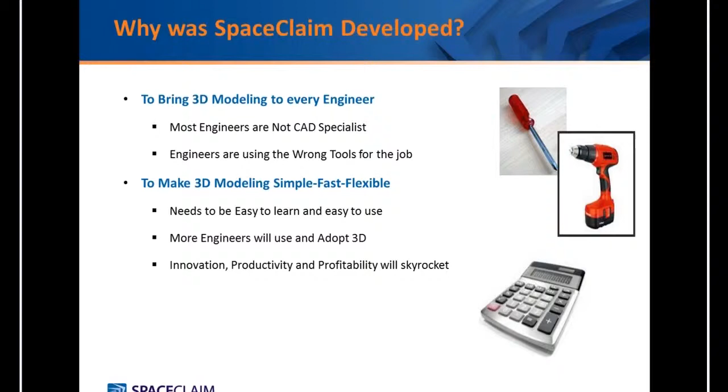So why was SpaceClaim developed? We're founded by the same guys who pioneered feature-based modeling, Mike Payne and Denny Dean among them. They recognized that there's the CAD specialists, and then there's everyone else around them - the engineers, the analysts, the engineering manager. CAD isn't exactly their core competency, and they certainly have plenty of things to do. The traditional CAD systems are just too hard to use, too hard to learn, so SpaceClaim was developed to address that problem.

Well, how do we do it? To get right down to it, it's the user interface interactions. It's simple and streamlined, it's intuitive to use. You want to change something, simply select it, pull it, and move it. You don't have to struggle with feature history or a feature tree, so it's inherently more flexible when it comes down to modeling and making changes to your model.

So how are customers using SpaceClaim? Our customers are using SpaceClaim anywhere from manufacturing, creating fixtures and tooling, to prepping models for FEA. For today's session, we're going to focus primarily on using SpaceClaim in prepping a model for additive manufacturing - it could be the traditional SLA, SLS prototyping process or the newer 3D printing process. Whatever the case may be, there are a number of problems that SpaceClaim can help you solve.

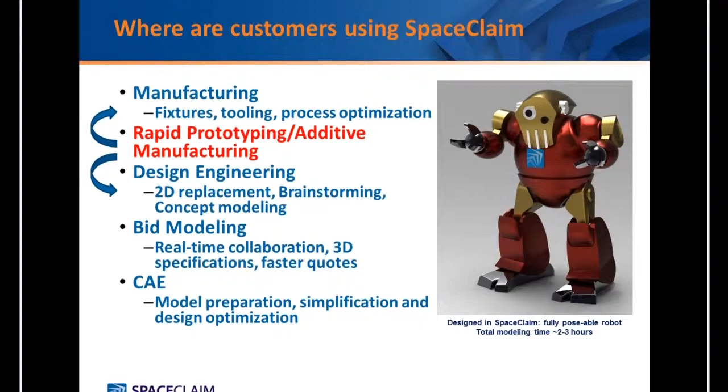On the right-hand side here, we have a little plastic toy model concept that I modeled in SpaceClaim. It's a fully posable robot with a lot of joints in it that took about 2 to 3 hours total modeling time. Since it's an assembly, I had to do a lot of pre-processing before I could send it out for printing. Our friends at Solid Technologies were kind enough to print this model out for us on their Z-Corp printers. They printed this 6-inch model on their Z-Corp Z450 printer, one of the larger models. It took about 5 hours to print, and the actual material cost itself is about $30.

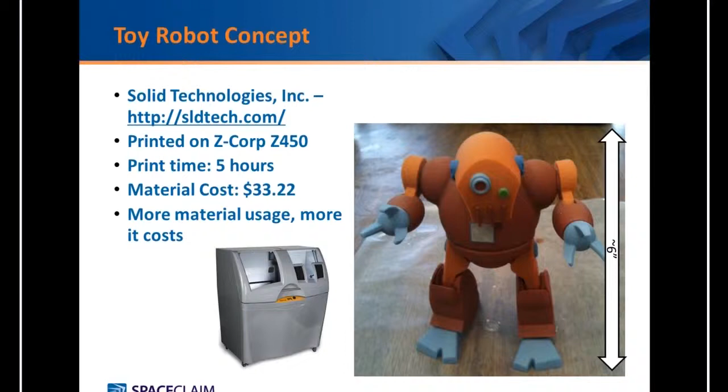Obviously, if you use more material, it's going to cost you more. If you want them to print it for you, it's going to actually cost you about $250 because there's some manual labor involved in the printing process.

There's a couple of illustrations here to show you what they do. What's unique about these Z-Corp printers is that, well, they're like any other additive process - they build the model layer by layer, but they build it on this powder matrix that's really like plaster. The print head actually prints in color, so you can see that the final product actually comes out in multiple colors versus other processes.

Once the model is done, they have to take it out of the powder and then do some fine depowdering, which they can then recycle and reuse. Once the model is done, they'll also have to coat it and essentially seal it with some type of resin so that it's more durable. It's a really neat process. So this is one example of additive manufacturing.

So let's jump into SpaceClaim for a second and see how we can use SpaceClaim to pre-process our model for this kind of 3D printing.

So I have an empty design here, and the first thing I'm going to do is import a couple of files. You can see from our file type list that we're able to import a number of different file types, including major players like CATIA, ProE, SolidWorks, as well as some generic files like STEP, ACIS, and Parasolid.

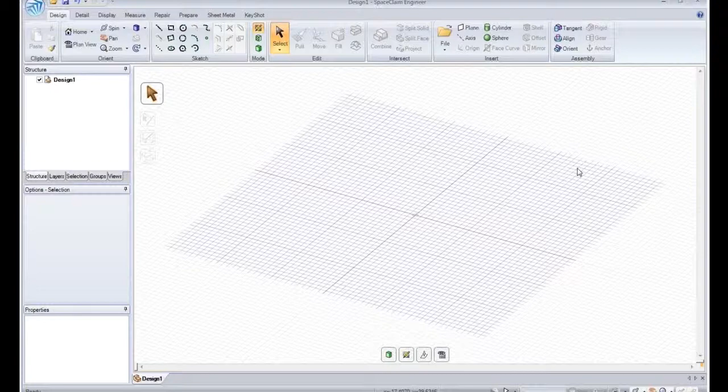So if you're working in a multi-CAD environment, SpaceClaim is a great tool to use. I'm going to set it to all files here, and I'm going to grab the STEP file as well as this ACIS file, and import them both at the same time.

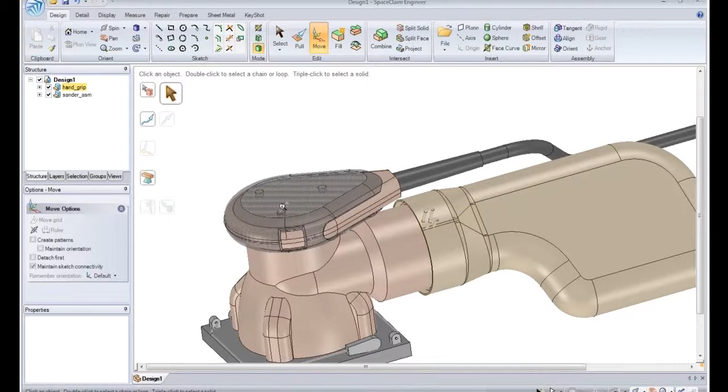Now that I have my sander model in here, I want to first make sure that everything is a solid, because in order to send your model to the 3D printer, the geometry has to be completely watertight solids. From first glance here, I can see that I have a little problem on my hand grip - it's kind of transparent, and if I show it in the structure tree on the left-hand side, you'll see that it's actually not a solid, but a surface.

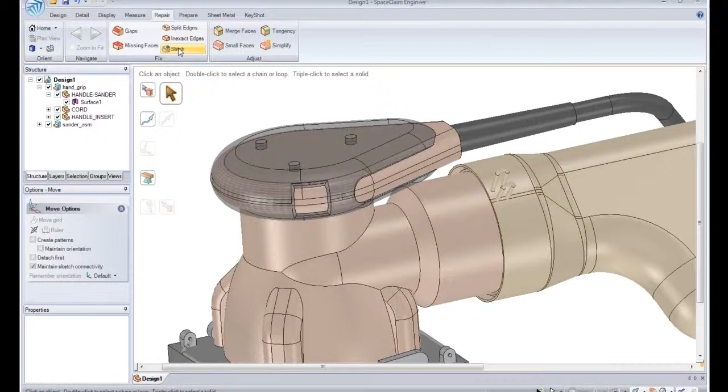It's probably coming in as bad geometry - maybe there are some gaps in the boundary - but that's not a problem because SpaceClaim has a number of powerful and automated repair tools that allow me to quickly find the problem areas and then automatically fix them.

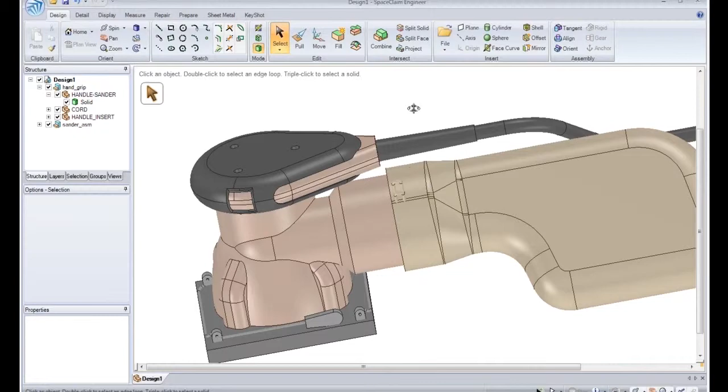So now that I've stitched the surfaces back together, you can see that it's now a solid and the color has changed. So that's pretty fast in terms of repairing geometry.

Now the other thing I'm going to look at here is this big cord that's kind of sticking out. I really don't need this cord to be printed out. If I'm printing a mock-up, I'll probably end up sticking a real cord on the model anyway. So I'm simply going to select it and hit the delete key and get rid of it.

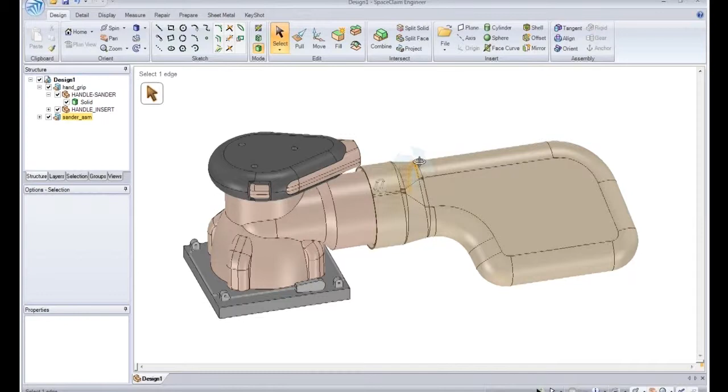And you can do this with a lot of things, like internal components. If you don't need all the internal components, because if you're printing out a concept, why would you need them? SpaceClaim lets you do it without having to modify or redefine children components or fix missing references. It doesn't care, it just lets you do what you want and go on to the next thing.

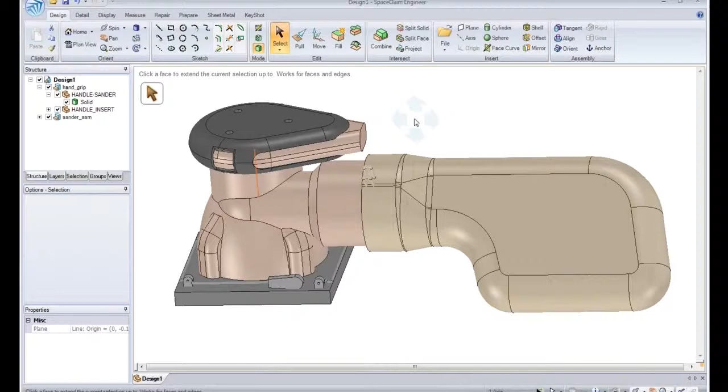So that's the external part of my model. Now if I want to find other problem areas, I'm going to have to look inside the model. So I'm going to use our cross-section mode to take a good view inside my model, and I can scan it for potential issues, and I can see there's a couple of problems.

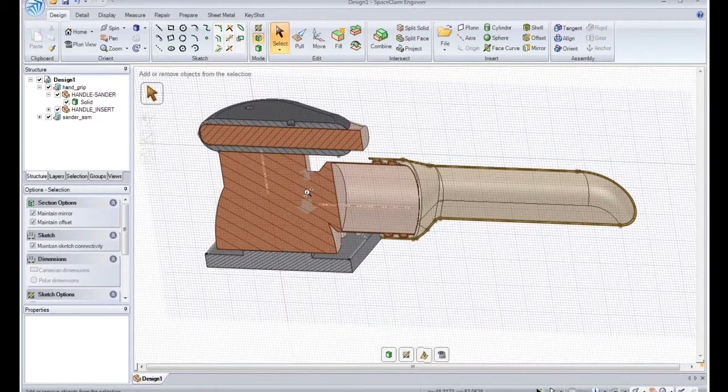One, the components on the left-hand side are completely solid, and I don't want to print out this giant block of stuff because I'm paying by the cubic inch, and two, it's going to be pretty heavy. So we'll address that in a moment.

If we come down to the right-hand side, we'll see other issues, which is the opposite problem. Our walls here are actually kind of thin, and they might not build properly depending on the process you choose or the material you're using.

So we'll have to address those somehow. Even if they build, they might just crumble in your hand if you take it out of the printer, so we'll have to thicken those somehow.

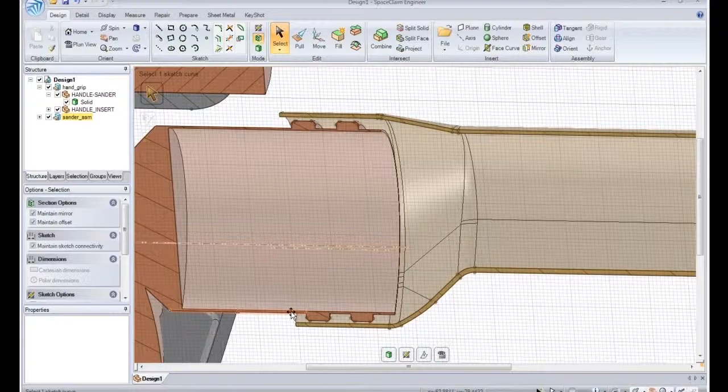Looking closer, you can also see that the dust bag is actually not attached or touching the sander's nozzle. So even if we printed it out, the parts wouldn't go together anyway, so we can't really assemble those two parts together. We'll have to address that as well.

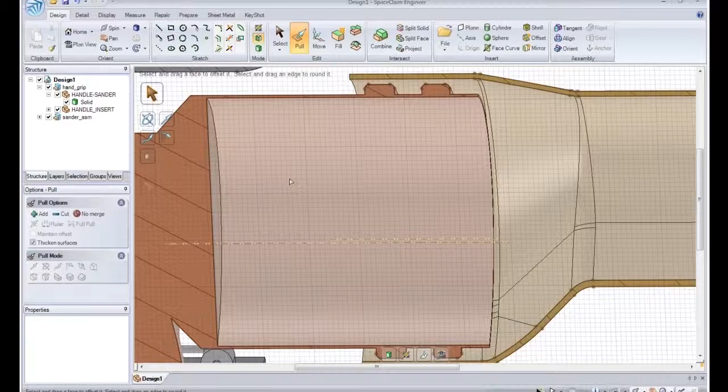So let's take a look at thickening the wall first, because that's probably the simplest thing to do, and that would get us partially to where we need to be in terms of closing this gap.

Like I said before, the power of SpaceClaim is the flexibility and freedom you get. So if I see something that I need to change, I simply come in here and pull on it with our pull tool, and I can enter in a particular radius for that cylinder. That's fine. And even though I'm in a cross section, I'm free to modify anything I can select. If I want to make a round in cross section mode, that's no problem. I can actually influence 3D geometry in this 2D environment.

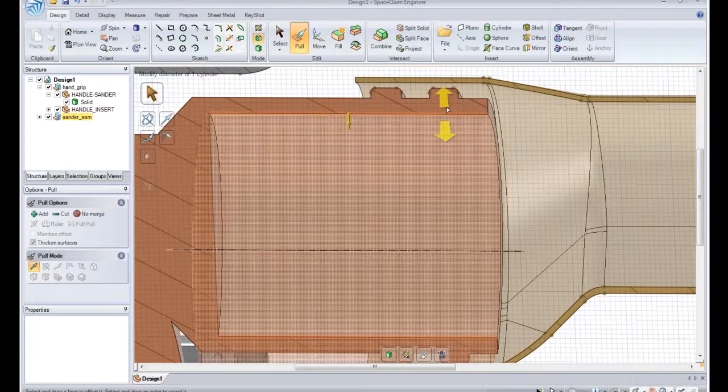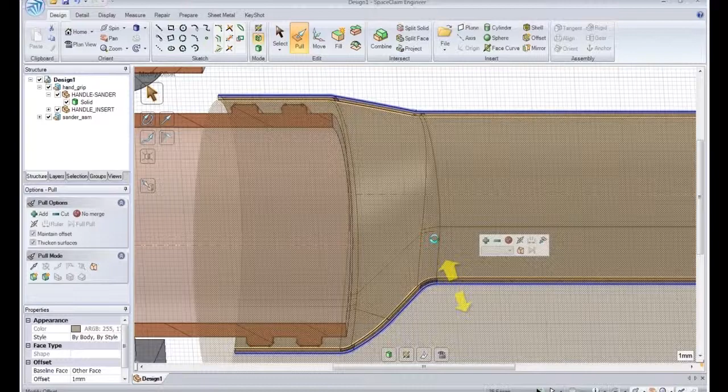Now, if I want to thicken this bag, I have a number of different faces that I might have to select. Instead of picking them one by one, SpaceClaim gives me the ability to find all the surfaces with the same offset, and now I can simply grab them all and type in the thickness.

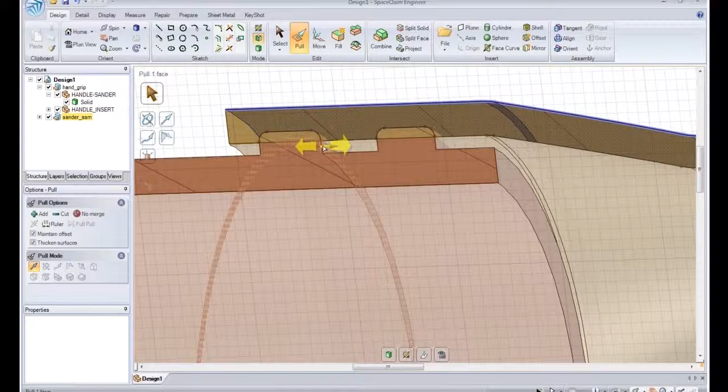So thickening those walls gives us pretty much what we need in terms of closing this gap, but there's still areas that are sort of forming an air gap, or a powder gap in the case of the Z-Corp printer. We probably want to fill that in anyway, but that's not a problem because, again, we can use the pull tool to just pull the geometry to wherever we want, to fill in those gaps.

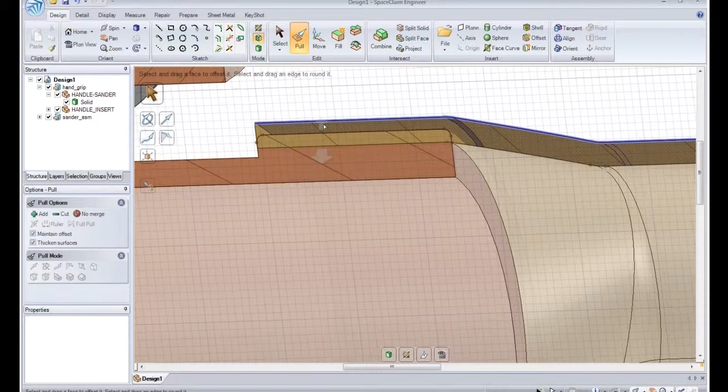I can select a face and snap it to a different face. I can select this face over on the left-hand side, and then snap it to the end of the bag, and then simply adjust the diameter of that nozzle opening. Our goal is going to be merging all these parts into a single piece, so I don't mind them overlapping at this point, so let's consider that part done.

Now we'll have to address the solid parts over on the left-hand side here. Well, that's not a problem either. We can simply use the shell tool and core out all the internal solid that we don't need.

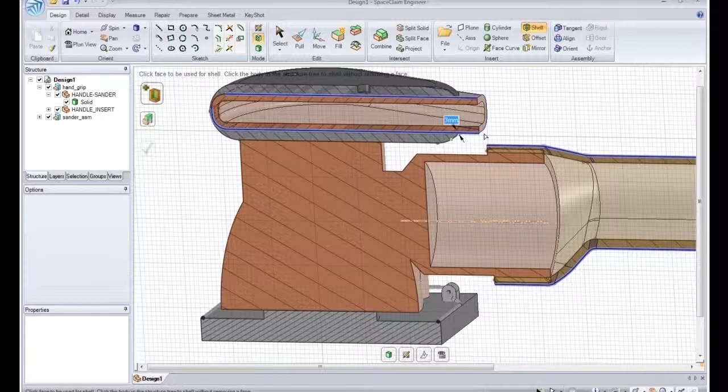So it's pretty simple for that part, but if we look at the sander itself, we see that there's already a part that's in the right thickness and the rest is not. So the power of SpaceClaim allows you to split a body into multiple pieces with just a click. Now I can simply ignore this thin part here and just work on the part that I'm concerned with.

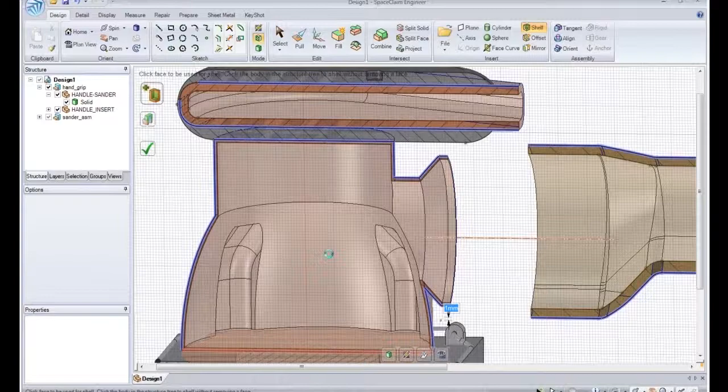I can again select the face to shell it out, removing all that solid material that I don't need.

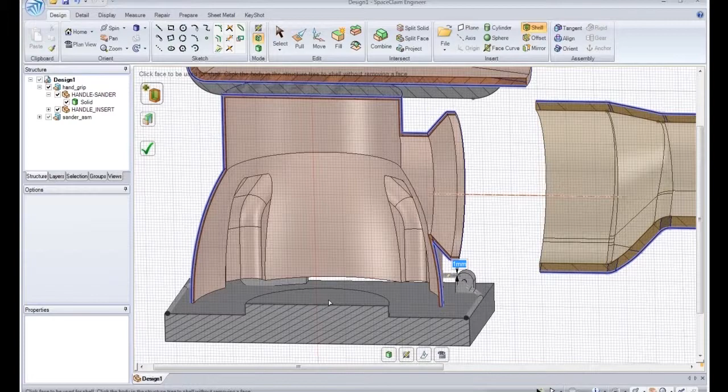Now, here's the problem though. I have this pretty hollow thing that may or may not work in terms of structure. But the bigger problem is that I now have this sanding pad that's not really touching the sander. So instead of just shelling out the sander, I'm going to do one thing before that.

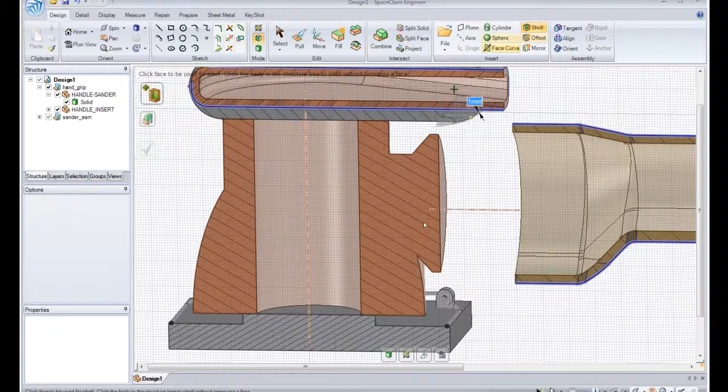I'm going to undo, and I'm going to use our cylinder tool to make a quick cut on the inside of the sander. It's a quick way of creating geometry where you need it. So now that I have that cylindrical face, I can simply shell that out.

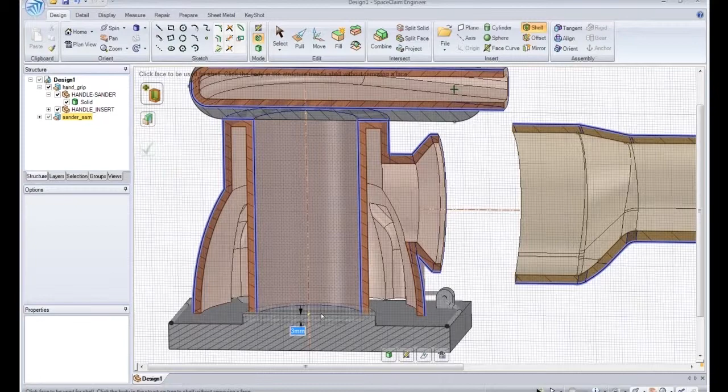And now I have a sander column here that the sanding pad can attach to. It also provides some more structure in terms of the model itself. So I'm going to enter in 3mm thickness, and I'm going to proceed to shell out the rest of the model here.

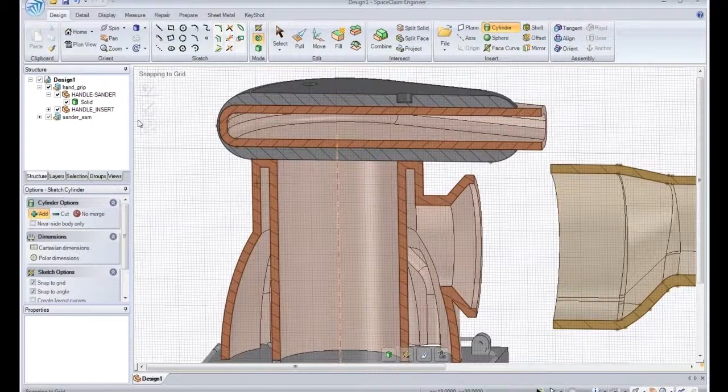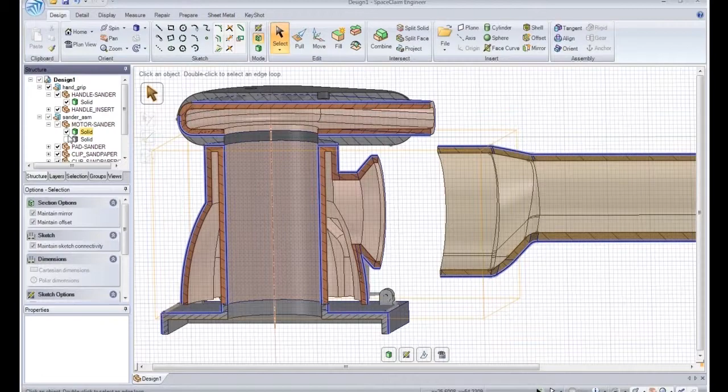Now I can align these cylindrical surfaces and form basically a path. The last thing I'm going to do is actually open this part up, this part that I really don't require material. So again, using the cylinder tool, I will make another cylindrical cut. This way I can easily remove anything that's trapped inside the model. For example, the Z-Corp printer's powder, you can easily get all that powder out with these larger paths. So let's turn the nozzle back on here.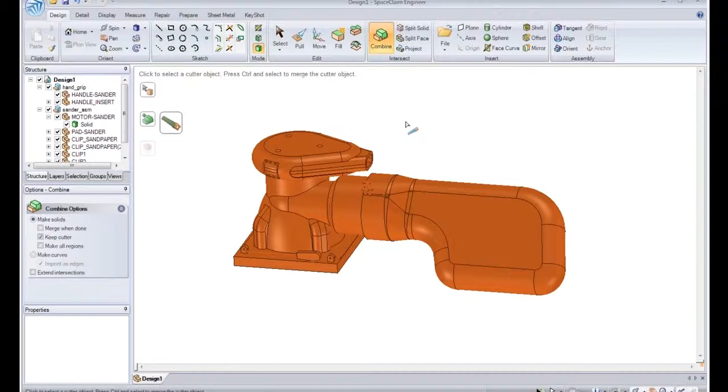And now it looks like I'm ready to merge all these parts together into a single piece of solid. So I'll head back to 3D mode, and simply select them all, and with a single click of the combine tool, I now have a single solid. Well, is this ready to print yet? Kind of, but I see a problem here, actually a couple of problems. One, this model is probably a little too long to print.

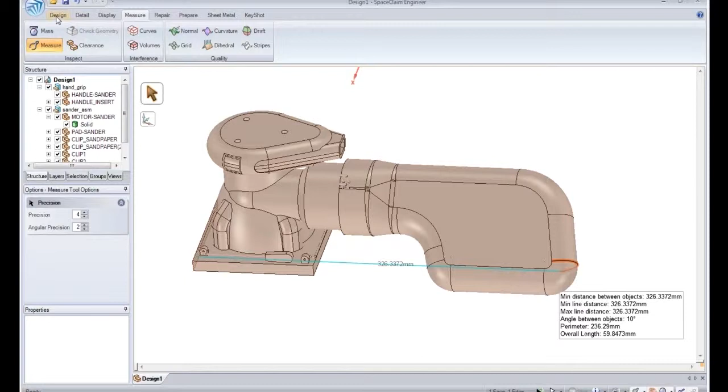Now if I measure the length of this model, it's about 33 centimeters. It's a little over a foot, I believe. And some printers may be able to fit it into their build envelope. Some can't. It really depends. So in our case, we're going to actually have to split this model into two parts, into two components, so they would fit inside the build envelope.

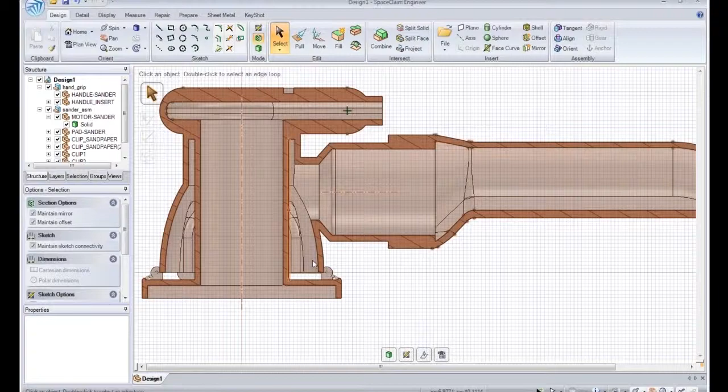The other problem is actually inside the model here. I'll go back to cross-section mode. And I can see that I have this large mass on the right-hand side that's sort of hanging out in space, and it's probably going to apply a lot of torque on this spot here. So to counter that, I'll have to add some structure on the bottom of this shell here.

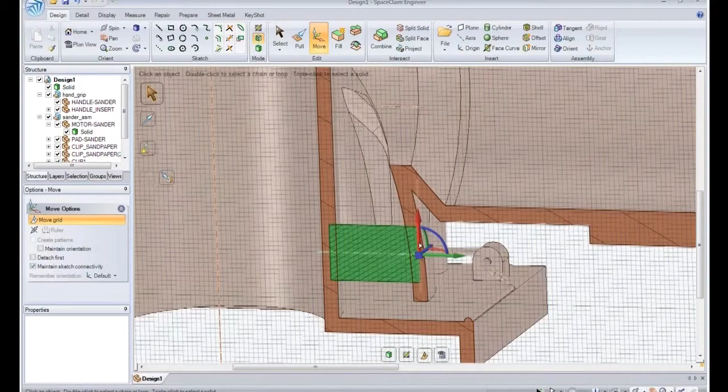So I'll use again our cylinder tool here for rapid geometry creation, and simply just add one of those support posts. And I can adjust the diameter of that cylinder, certainly. Now if I flip our cross-section by 90 degrees, I can simply create a pattern of these posts all the way around the base of my sander to provide that additional support.

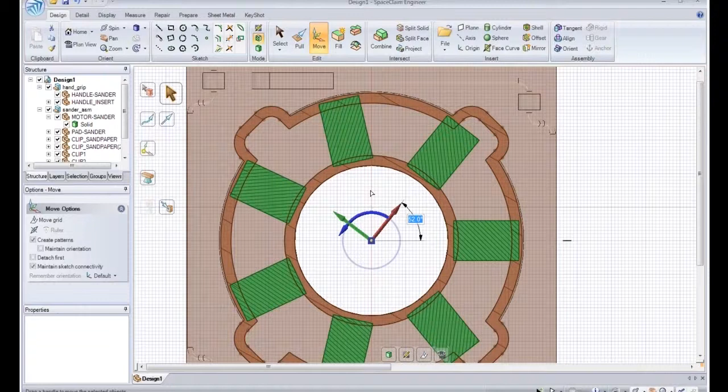You can see that it's snapping to places where I can make regular patterns, but I'm going to stick to 4 posts at 90 degrees. And with a quick click of the combine tool, I have incorporated that geometry into my sander. So it provides additional support within seconds.

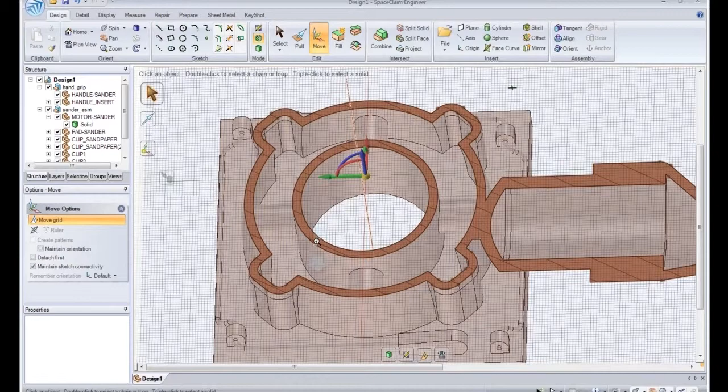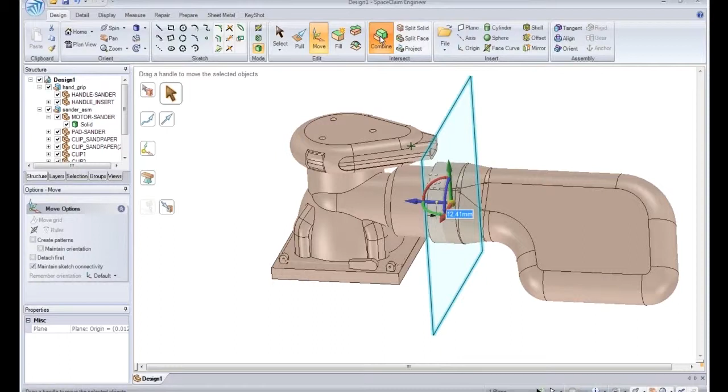All right, now let's address our other problem here. I'm going to have to split the bag away from the sander and probably somewhere in the middle of this cylinder here. So I'll start by creating a plane, a cutting plane. And I'll move that into place somewhere around there. Again, our friend combine tool, select the solid, and from one solid I've created two. So we started with multiple components, merged into a single solid, and now we can split it again into multiple pieces. Again, flexibility.

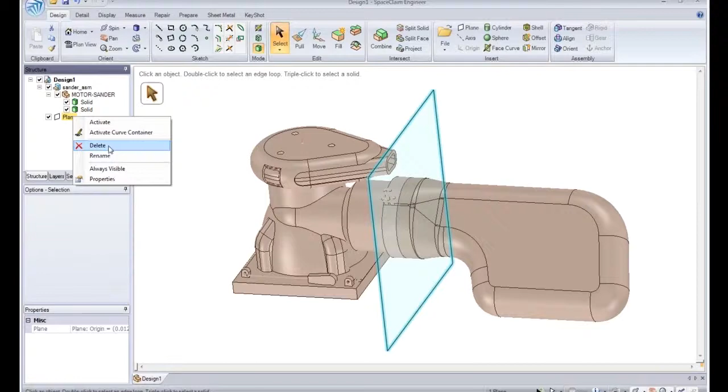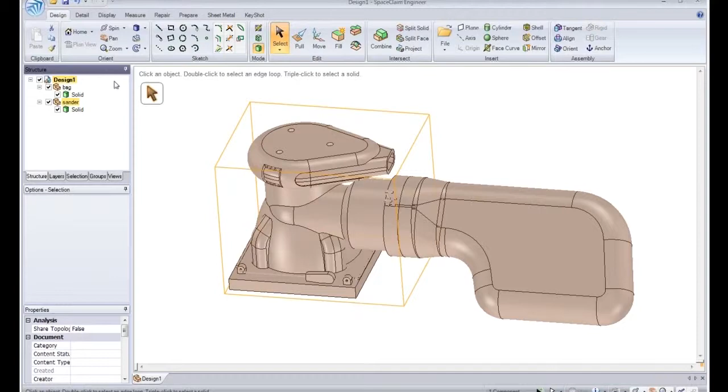All right, before we proceed any further, we're going to have to do some cleanup here in our structure tree. I'm going to first delete all the empty components, delete the plane that we used to cut the two parts, and let's move these solids into their own components. So now that we have a nice clean structure tree, we're going to rename these components for whatever we need them to be. And just for clarity's sake, I'm going to recolor them as well. Okay, so we have our two components.

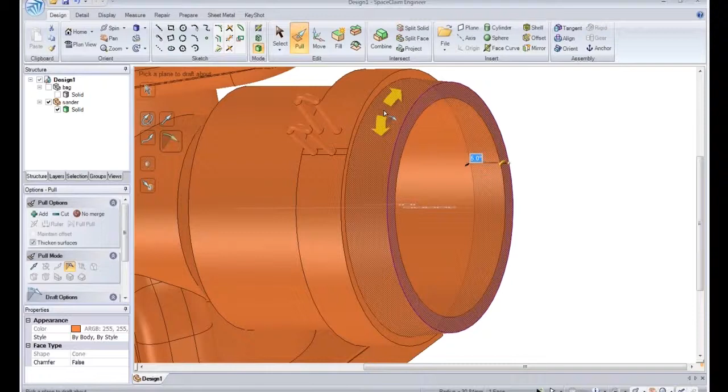But how are we supposed to put them back together once they're done printing? I mean, I have just two flat faces here. Really, it's going to be pretty difficult to align them. But that's okay. We can come in here with our pull tool again and rapidly create a lap joint simply by offsetting the edge and pulling out that region. I can add a little bit of taper in here so it will fit into the other part easily. And I'm going to type in 3 degrees.

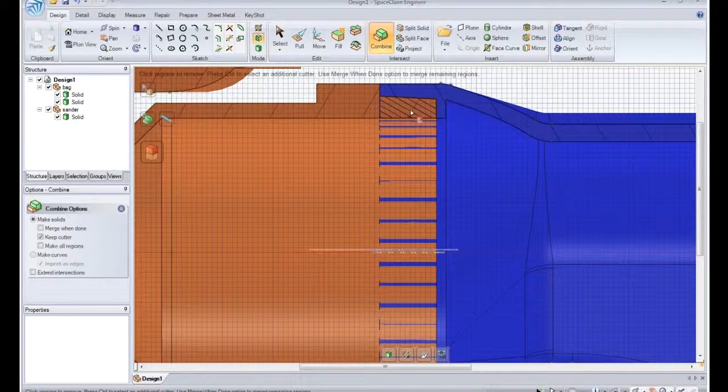That should be 20. Now we go back to our bag and go back into our cross section. You see that we have our lap joint, but we have to remove that geometry from the opposite side. So we'll take the combine tool and using the lap joint as a cutter, remove that overlapping geometry. We now have a nice clean lap joint that allows us to easily assemble these parts back together.

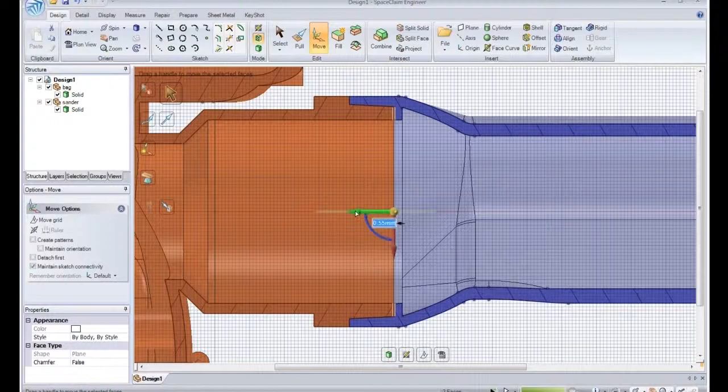Now if I need to adjust that lap joint, I can simply select it again like I did before. Select the faces you want and simply transform them. You can grab that, adjust to wherever I want. And just in case, we probably want to add some clearance here with the pull tool, just so that it would accommodate some of the tolerance variations from the printout.

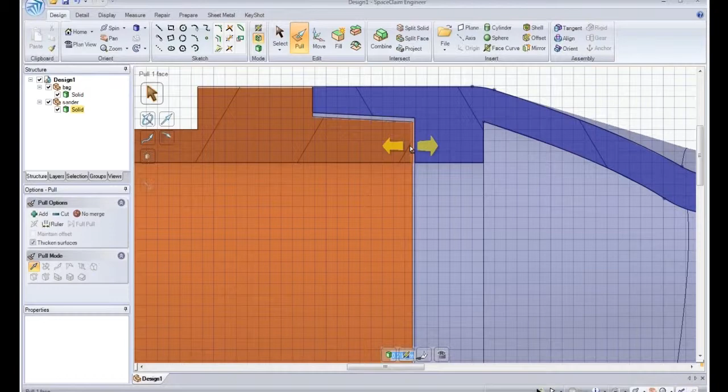And if I want these two faces to mate together on the exterior, I probably want to add some clearance here as well. So again, using the pull tool, I can easily tweak the model to whatever I want. I don't have to deal with parent-child relationships. I don't have to figure out how the feature was constructed. I just see what I want to modify. I simply grab it and I modify it. And that's the power of SpaceClaim and direct modeling.

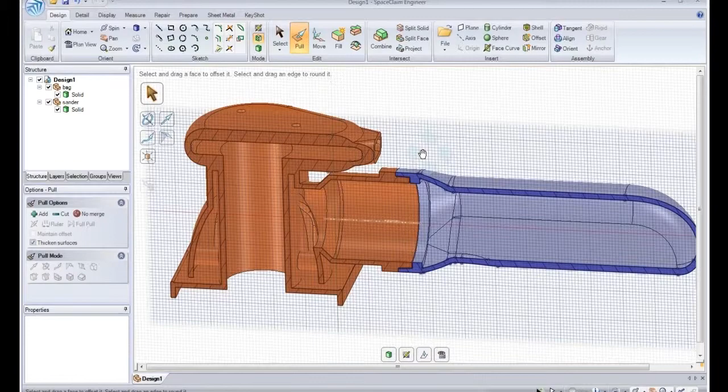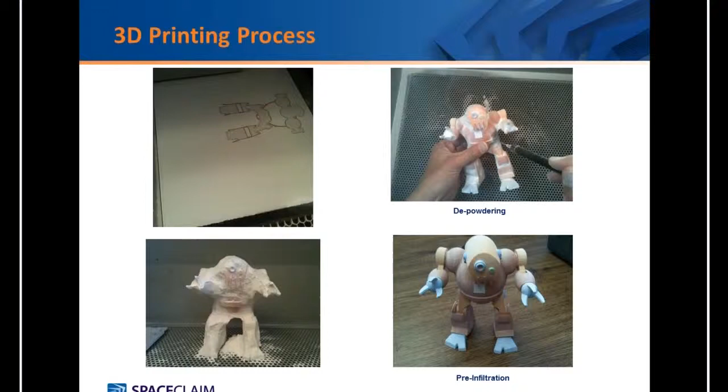So now our components are prepped and ready to be printed. So that's the end of the demonstration. So I hope this webinar gave you a good overview of how SpaceClaim fits into the additive manufacturing process and how it can help overcome some of these issues. Maybe it be working with different file formats or fixing geometry issues or increasing wall thickness. SpaceClaim makes a lot of these modeling tasks a lot easier. Certainly makes it work faster.

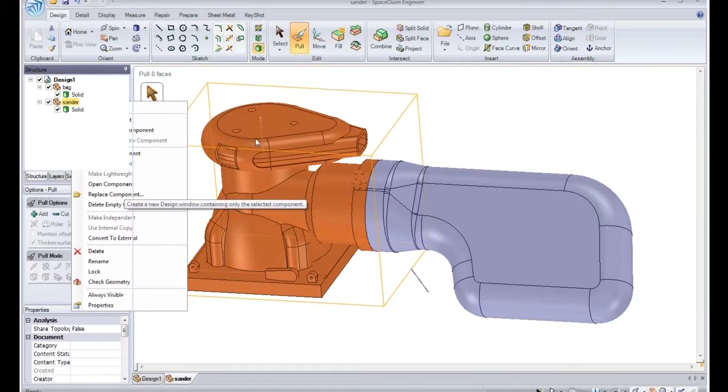So it's probably time for questions. Let's see here. How do I get the model printed? Well, some of the 3D printers take SLA. Well, SLA primarily takes STL formats, and SpaceClaim can certainly export STL files. The Z Corp printer actually supports VRML files because they print in color, and VRML files contain color information.

So all you have to do is do a save as, and select STL or VRML as a file format, and you can also adjust the resolution of the output as well, right inside SpaceClaim options. All right, let's see what other questions there might be here.

Is there training available for SpaceClaim? And yes, we do have training. We have self-paced tutorials and live classes over GoToWebinar. You can find them all at spaceclaim.com under the support menu. How long does the training take? Well, the free training over the web takes about an hour, probably 45 minutes. It's really not that difficult.

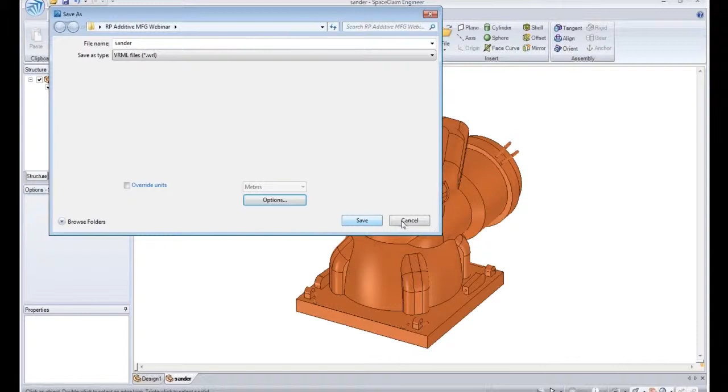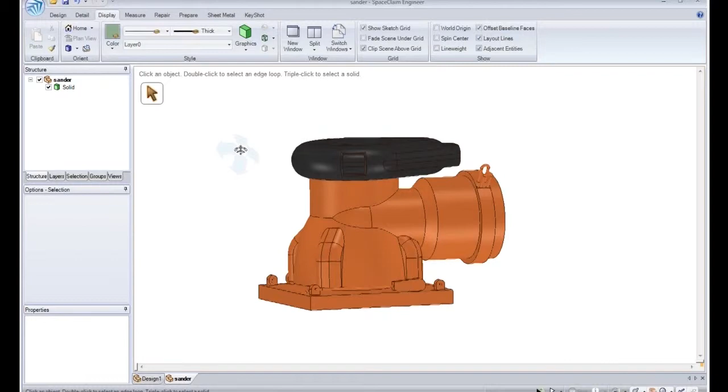I'm a pretty new user myself, so it only took me a few weeks actually to even become an expert on it. Can you change the face color? Yes, you can. Going back to my model here, I can simply select a set of faces using probably box select. This would be the easiest way to select a set of geometry and simply change that to any color I want. Let's undo that. Just make sure that you set the target to face, and you can set a subset of faces to a different color.

Do you need a background in mechanical engineering to use SpaceClaim? No, you don't need a background in mechanical engineering if you like to use SpaceClaim. We offer a free trial, 30 days. Just download it, take it out for a drive, and see how you like it. It's really geared toward people who don't use traditional CAD but want to model in 3D, and you can see a lot of the interaction is really direct with the geometry. Simply select it and modify it. That's how simple it really is.

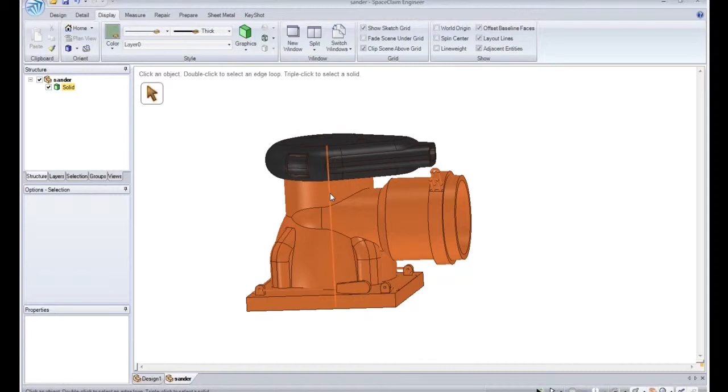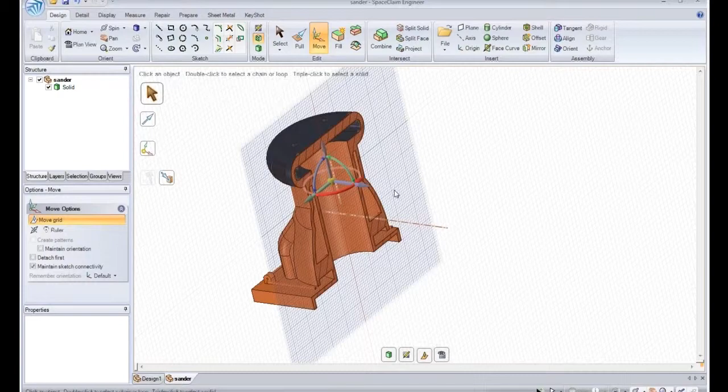How do you get into work in the section view? Well, it's simple. You can simply select an axis or a face, and then go to the section mode in our design tab, and simply click section mode, and it'll get you into a cross section. And you can click this little button here to move the grid here, and just scan through the model or double click on one of the rotational arrows to flip it 90 degrees and drop it wherever you want.

Can you put a radius on a native STL file? We allow you to open STL files, but unfortunately there's limited interaction with lightweight facets, which are what STL files are going to come in as. So what you have to do probably is to build your model around the STL file, and we allow you to reference the STL faces and facets when you're pulling things or moving things. You can actually snap your geometry to the facets.

Does the program work as easily if you're starting with the STL file? Well, again, if we import an STL file, we allow you to build around it, and certainly creating geometry in SpaceClaim is just as easy. You simply start by tracing your STL file, and then again push and pull to get what you need to do. Really, everything is based on these four major tools: pull, move, fill, and combine. And we only used 3 of them in our demonstration today.